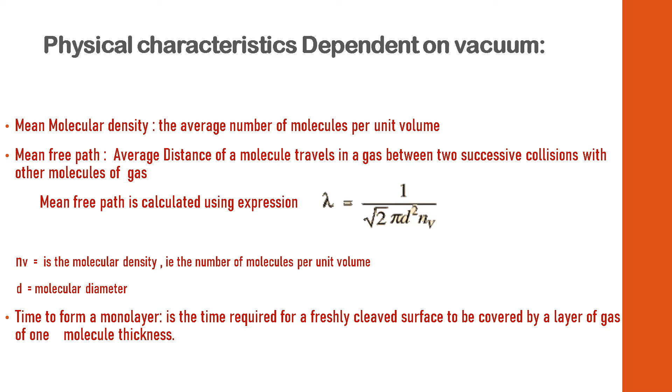Then next term is time to form a monolayer. This is the time required for a freshly cleaved surface to be covered by a layer of gas of 1 molecule thickness. To improve a vacuum system requires the following: a decrease in pressure, a decrease in molecular density, an increase of mean free path, an increase in time of formation of monolayer.

And we must be familiar with another term, that is Knudsen number Kn. It is defined as the ratio of mean free path to relevant dimensions of vessel through which the gas flow takes place, that is lambda by d. When it is very much less than 0.01, it corresponds to viscous flow. When it is greater than 1, it corresponds to molecular flow regime.

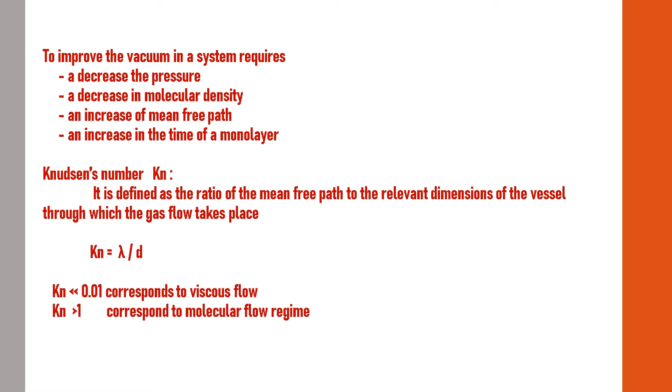These are the important applications of vacuum technology depending on the physical property. For a good vacuum system, we need low pressure, low molecular density, high mean free path, and long monolayer formation time. There are many applications, like holding, lifting, vacuum cleaners, etc. When attaining low pressure and low molecular density, it is used in lamps, etc.

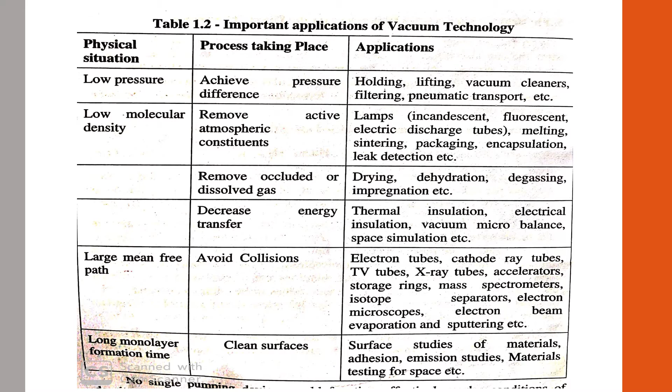And the large mean free path avoids collisions, and the applications are accelerators, storage rings, mass spectrometers, isotope separators, etc. And when the monolayer formation time is large, it produces clean surfaces for emission studies, material testing for space, etc.

High vacuum pumps. The pumps having limiting pressure less than 1 atmosphere, above which they are ineffective, are called high or fine vacuum pumps. Such pumps must be preceded by another pump such as fore pump, coarse pump, or roughing pump, which will remove the bulk of gas in the chamber and hence reduce the pressure to the working range of high vacuum pump, that is 10⁻¹ to 10⁻³ torr. This pump maintains vacuum by removing the gas evolving from the surfaces.

A backing pump is used to extract residual gases from the high vacuum pump to maintain the low pressure. The pressure of this pump is known as backing pressure. And note down one thing, the fore pump must match the speed of high vacuum pump, and for fast pump down, the pumping speed of fore pump must be large.

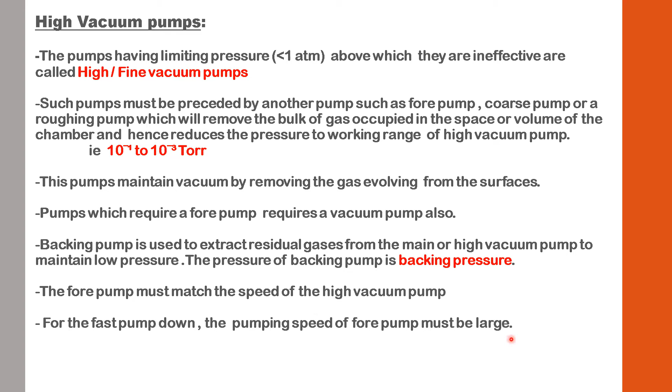Vacuum pumps. Generally, vacuum pumps can be divided into positive displacement type, momentum transfer type, cryo pumps, sorption pumps, ion pumps. Positive displacement and momentum transfer types are known as throughput pumps, because the gas is evacuated from the chamber, compressed and exhausted to the atmosphere. Cryo, sorption, and ion pumps are called capture type pumps, because the gas molecules being pumped are trapped on the internal surfaces within the pump by sorption or condensation.

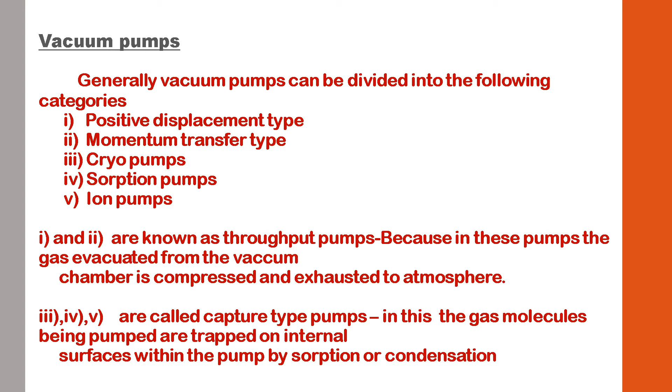The vacuum regions are categorized as low and medium vacuum, LV and MV, where the number of gas phase molecules is larger than the covering phase, down to 10 raised to minus 2 torr. And high vacuum range, HV: gas molecules are present on the surface and the pumping process evacuates molecules leaving the surface toward the pump. The range of pressure is 10 raised to minus 3 to 10 raised to minus 10 torr.

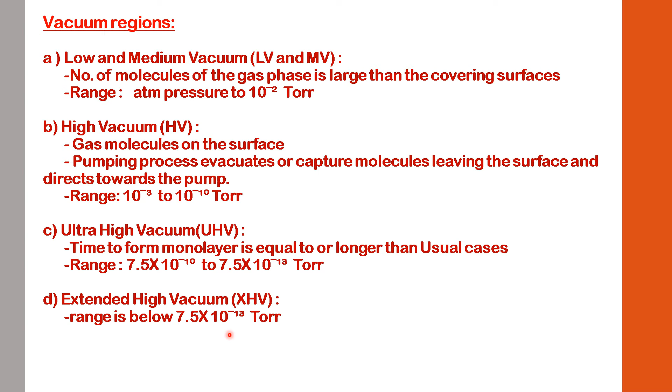Next is ultra high vacuum. The time to form a monolayer is equal to or longer than the usual measurement time in UHV, and the range is 7.5 × 10 raised to minus 10 to 7.5 × 10 raised to minus 13 torr. The extended high vacuum range is below 7.5 × 10 raised to minus 13 torr.

Next topic is roughing pump. A variety of mechanical pumps are used in the initial evacuation of a vacuum vessel. The common pumps in this category are oil-sealed rotary vane pump and rotary piston positive displacement type pumps. The commonly used fore pump is oil-sealed rotary vane pump. Today's topic is oil-sealed rotary vane pump or rotary pump. It is positive displacement type and the operation is based on periodic variations in the volume of pump chambers.

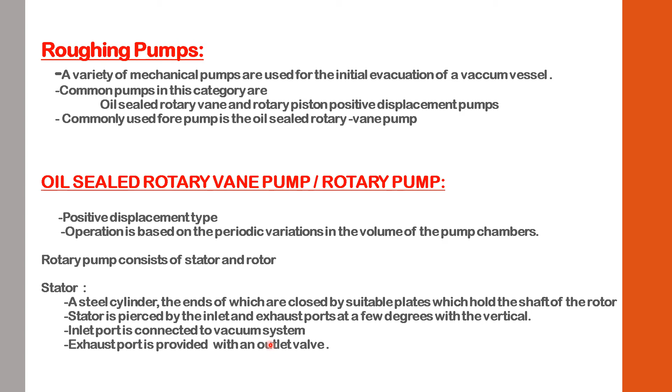It mainly consists of a stator and a rotor. The stator is a steel cylinder, the ends of which are closed by suitable plates which hold the shaft of the rotor. The stator is pierced in two places for inlet and exhaust ports at a few degrees with the vertical. The inlet port is connected to the vacuum system. The exhaust port is provided with the outlet valve.

And the next is rotor. A steel cylinder mounted on a driving shaft. Its axis is parallel to the axis of the stator and is displaced from it. It makes contact with the top of the surface of the stator, and the line of contact between the two parts is known as the top seal between rotor and stator.

And there are vanes, that is, a diametrical slot is cut through the length of the rotor and carries two vanes. The stator encloses the rotor and the vanes are placed in the rotor. The vanes are rectangular steel plates. The rounded edges of the vanes make good contact with the stator wall.

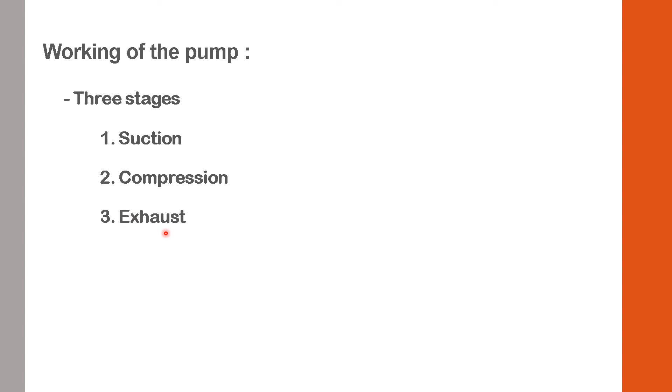Next is the working of the rotary pump. The first stage is suction, the second one is compression and the third one is exhaust. These are the three stages. This is the stator, and in between there is a rotor, and the rotor is diametrically cut for vanes. The slotted rotor is eccentrically supported in a cycloid cam. The rotor is located close to the wall and it is sealed into the cam, or the stator body.

The vanes or blades fit within the slots of this impeller, and the rotor rotates; the yellow arrow represents the rotation of the rotor. The fluid enters the pump, that is the suction, and due to centrifugal force the vanes push against the walls of the housing. Now the tight seal, this is the top seal, a tight seal among the vanes, rotor and cam. The side plate is the key to good suction characteristics common to the vane pumping principle.

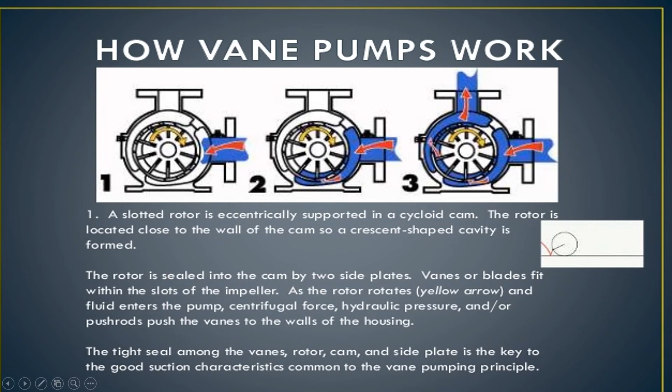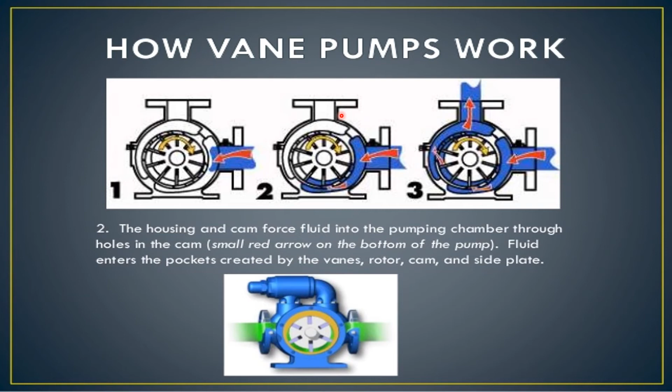And the next stage is compression. When the rotor rotates, the fluid enters the pockets created by the vanes, rotor, cam and side plates. This is the inlet port and this will be the exhaust port. The stator and the full vacuum system is totally covered with the maximum amount of liquid.

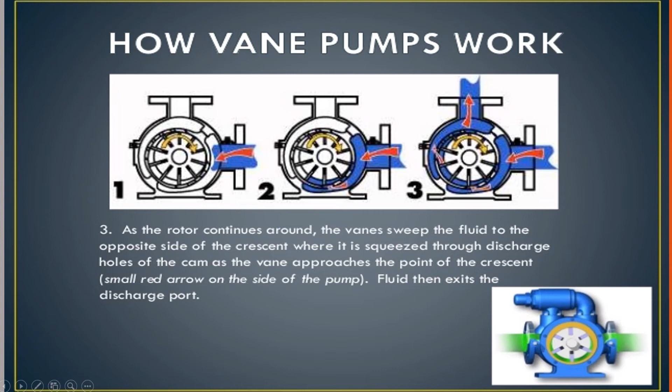And this is the third stage. As the rotor continues rotating, the vanes sweep the fluid to the opposite side of the crescent, where it is squeezed and exhausted through this valve, that is the exhaust. In such a way the fluid exits the discharge port. So this is the suction, this is the compression, and this is the exhaust.

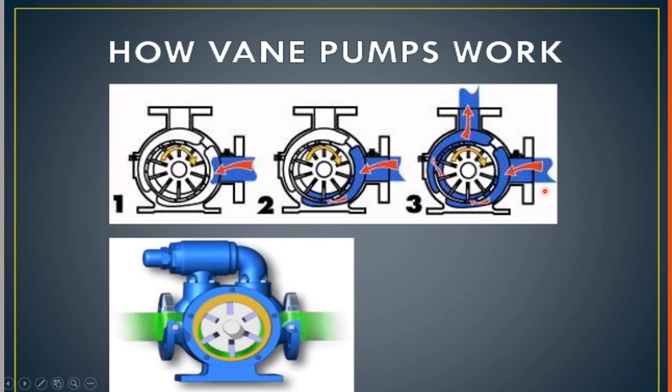During the operation of the pump, the oil seals the small clearances between the moving parts to prevent back leakage of pumped gases. At the very end of each compression stage, the cavity under the valve and the volume vacated by the pumped gas are completely filled with oil. The oil lubricates and partly cools the pump, and circulates continuously into the pump chamber through the clearances from a reservoir where it is held under atmospheric pressure.

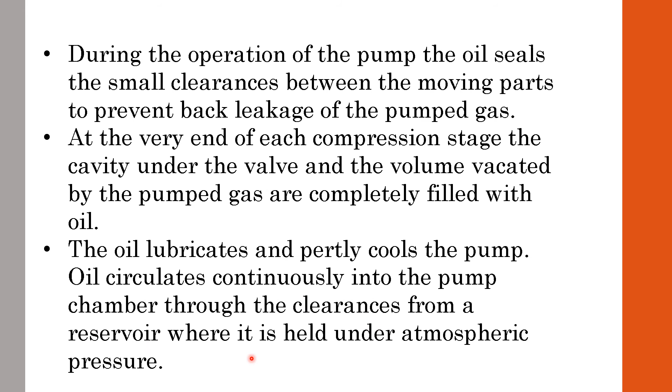The volume rate at which the gas is swept around the pump is known as the displacement St, that is St = 2Vn, where V is the volume between vanes A and B and n is the number of rotations per unit time. The pumping speed of the rotary pump versus pressure is shown in this graph. It remains constant from atmospheric pressure down to about 1 torr, and decreases to relatively smaller values below 1 torr, around 1 × 10^-3 torr. That is this region.

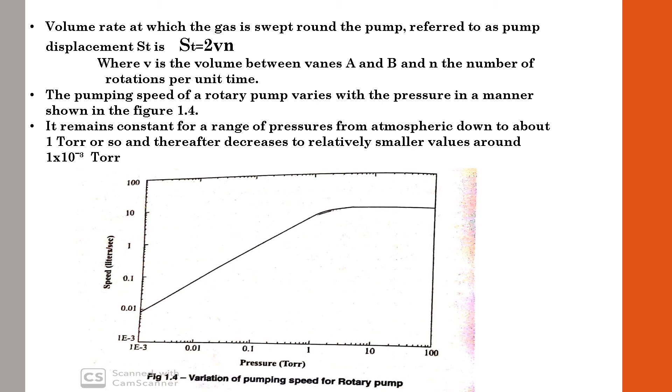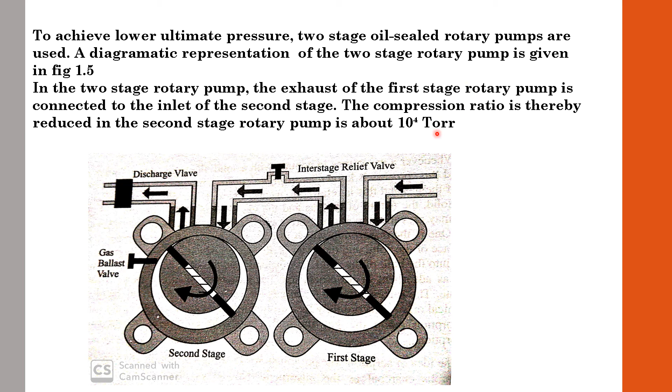The main problem faced in the oil-sealed rotary vane pump is contamination of the pump oil due to water and other condensable gas vapors present in the vacuum system. These condensable vapors compress and condense into liquid, and the condensate mixes with the pump oil and circulates in the pump, carrying these contaminants.

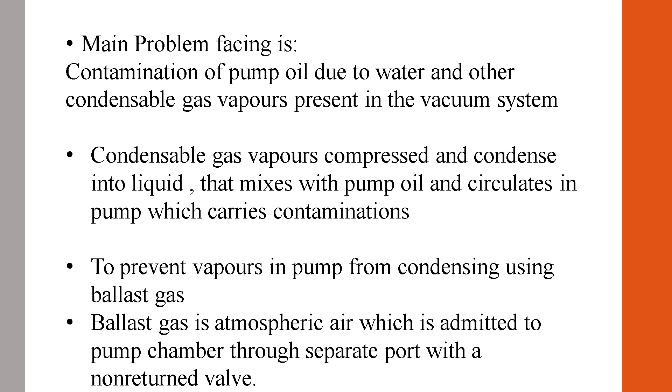This ballast gas now provides a large part of the pressure. The partial pressure of vapor may be kept below atmospheric, and for a wide range of pumping conditions below the vapor condensation point. In such a way, using the ballast gas method, oil contamination is eliminated. Repeating, ballast gas is atmospheric air admitted to the pump chamber through a separate port with a non-return valve. That's all about the working of a rotary pump, or oil-sealed rotary vane pump.